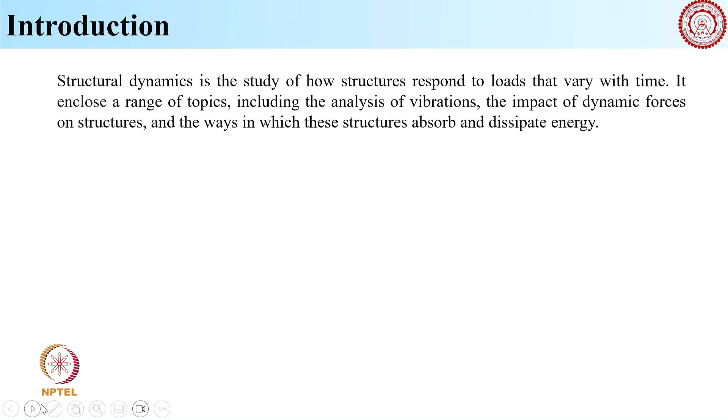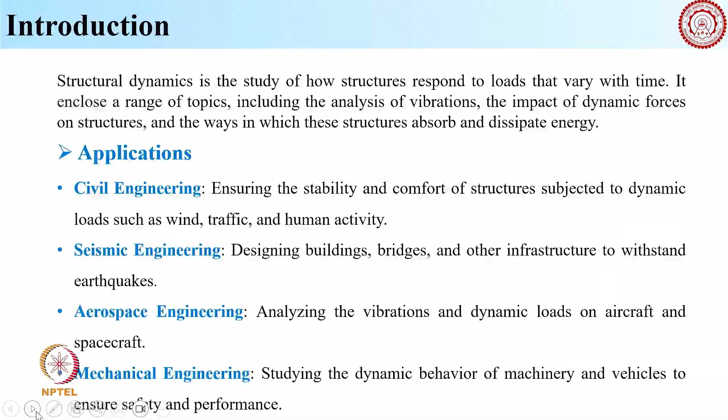Once we discuss how the structure is responding, we will also be able to see how we can mitigate or control the responses. Next, if I look at the applications of this structural dynamics course, we can see four broad areas where it is very applicable. First, civil engineering. Most of you are from civil engineering. Ensuring the stability and comfort of structures subjected to dynamic loads, for example, earthquake, traffic, wind, human activity, or several other types of loads.

Then seismic engineering, which is mostly due to earthquakes. Then the aerospace industry. When people are making aerospace structures, it can be spacecraft or an aircraft, or anything. In those cases, the analysis of vibration is also a very crucial aspect. Then in mechanical engineering also, for example, some types of machines are vibrating, or some rotors, some dynamo. All those things come under structural dynamics.

Sometimes it very well resembles the theory of vibrations, so sometimes this course is also known as the theory of vibration. There is a very good overlap between the theory of vibration and structural dynamics, because single degree of freedom systems, multi degree of freedom systems, continuous systems, and numerical integration are all also part of the theory of vibration.

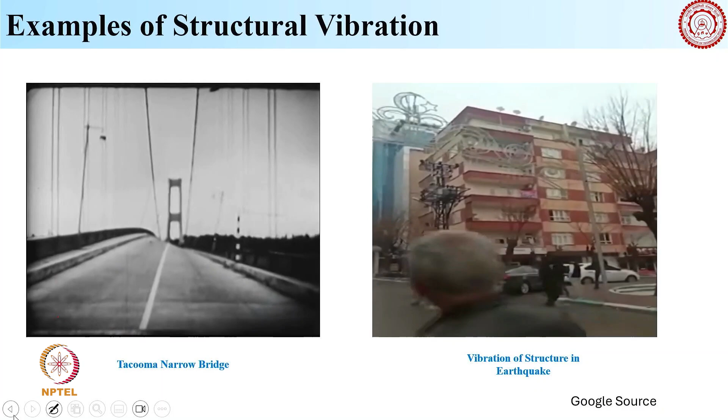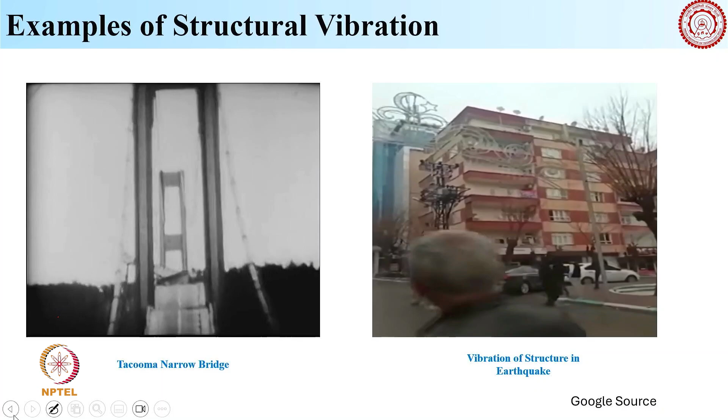You can see the left one is a video of the Tacoma Narrows Bridge. You can see how the bridge is vigorously vibrating due to the wind load, and finally it collapses. This is one of the prime motivations from where structural dynamics courses come into the picture. A bit of history: the Tacoma Narrows Bridge was designed for almost 3 to 4 times more wind load, but even at a small wind speed, the structure collapsed because it reached resonance.

And you can see such vigorous vibration happened. It's a real life video. It's not added or AI generated. It's a real life failure video. So you designed a bridge, but due to wind of much lower speed, a complete collapse occurred. So it's a very serious event. Then I'm going to the next one.

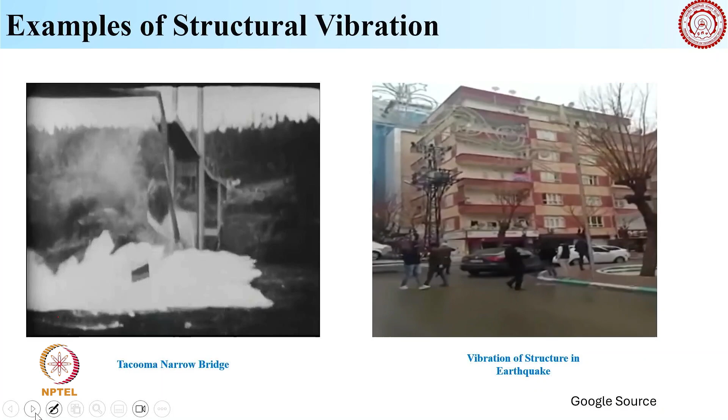You can see the earthquake vibration of the structures, and how the structures are collapsing due to the earthquake. Recently, the Turkey earthquake gave a very fresh reminder of the need for structural dynamics, and what type of catastrophe it can lead to if we do not consider it. Previously, the Nepal earthquake also caused huge devastation in that sense.

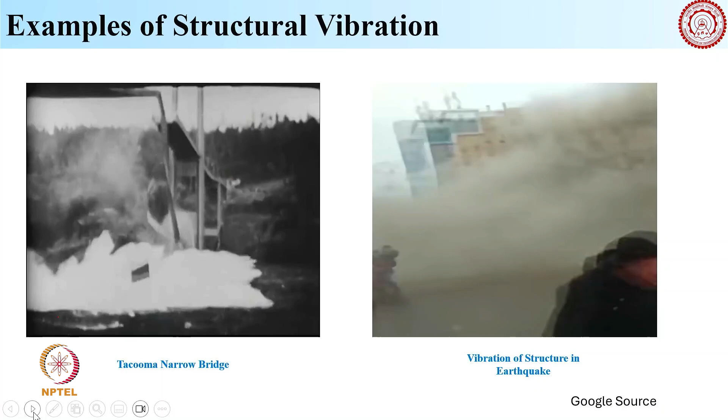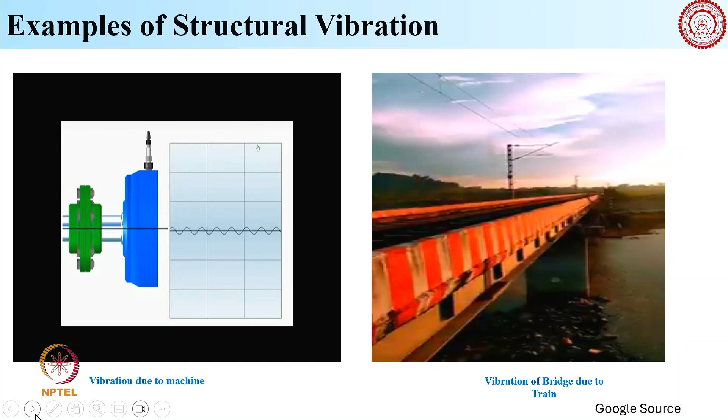So in all those cases, to measure the vibration, to understand how much vibration is occurring in the structure, and also if you try to control that vibration, this structural dynamics course acts as some sort of skeleton for that whole thing. Okay.

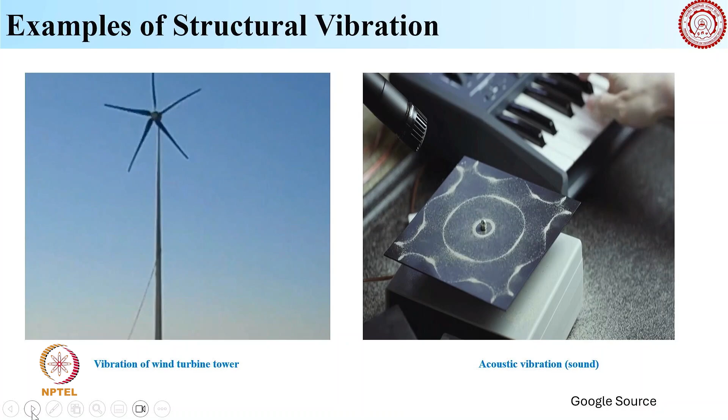Also, nowadays with renewable energy, we can see that sometimes these tower type structures are made, and they are also subjected to a very significant amount of vibration. And also when we are working with sound, that is also primarily generated due to the vibration of the wall or the panels. So that also creates a structural dynamics problem. So here you can see that once they are tuning it, it gives an oscillation. Okay, so all those things will be covered, a structure which is subjected to this type of forces.

So when we talk about how we are going to analyze, in our mind we have a structure, which is primarily a physical structure. It may be a building, it may be a bridge, or it may be any of the forms we have seen, or which are not seen but have some sort of dynamic responses. Because we just saw some of the cases, not the entire set. So the structure then needs to have some type of mathematical model.

Because suppose I talked about a bridge, the bridge is a big structure. So when we are solving it, we are solving for some specific output that we are going to look for from that bridge. So what are those outputs we are talking about? That we have to be clear in our mind. Is it in terms of acceleration? Is it in terms of displacement? Or is it in terms of bending moment, shear force? What type of parameters we are looking for should be clear in our mind.

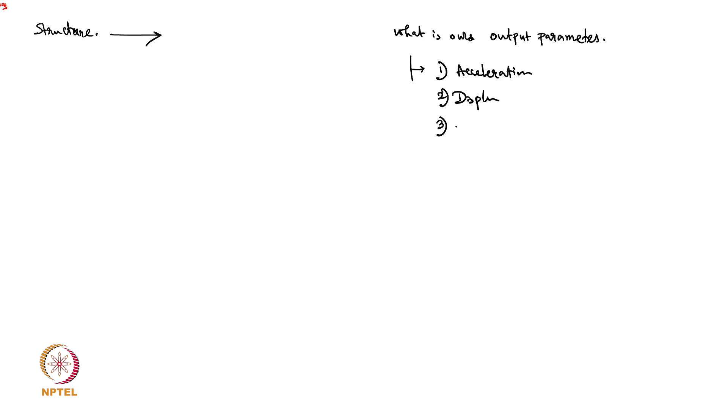So what type of parameter? What is our output? Parameters, for example, it can be acceleration, it can be displacement, it can be bending moment, shear force, any of those, or anything more. So to find that out, we need a mathematical model.

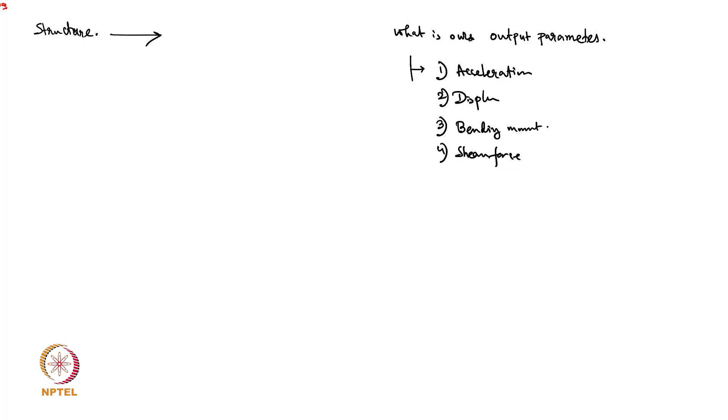And when we say we need a mathematical model, that involves how we are approximating our original structure into mathematics. So there are two things. Here we have some sort of approximation, and some assumptions are also there, and those also lead to what type of output we are looking for, and what is the fidelity of that, how well we are going to capture it.

Suppose, for example, you have a bridge type structure and you want to see the bending moment at each point. So your mathematical model should be able to capture these points so that it gives you the output accordingly. Or maybe you just need, okay, just tell me what is the deflection at the midpoint. Then you can make your model accordingly.

So obviously there is a trade-off. If you have a much more detailed model, it will be computationally more challenging. Or if you have a model which is much simpler, then it will be computationally faster, but you will get less result out of it. That is always the case, because you cannot have both.

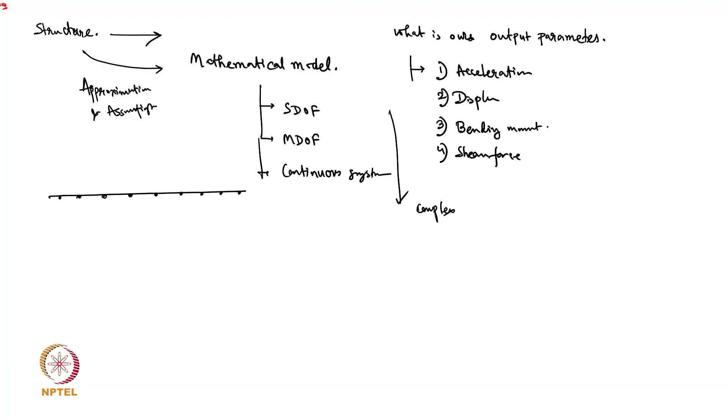So now let's see how a single degree of freedom system occurs and what basically a single degree of freedom system is. Before we start that, do you have any question up to this stage? No question? Okay, so we can go ahead with the next one. So please feel free, if you have any question, please raise your hand and you can ask the question.

Okay. So now let's see what a single degree of freedom system is. Let's assume the problem of an overhead water tank. I think most of you have seen an overhead water tank. So that's a heavy structure overhead which contains mostly fluid, and that structure is supported by some piers. So if we look at that structure, we can see that there is a heavy mass at the top.

Okay, so that mass is the mass of the concrete, and also it contains the fluid, so that fluid will also be there. So both things are there. Now after that we have the columns. So the columns will primarily provide the stiffness. Okay. So now this system can be subjected to wind or it can be subjected to earthquake. These are the two prime structural dynamics forces we can think of on a water tank.

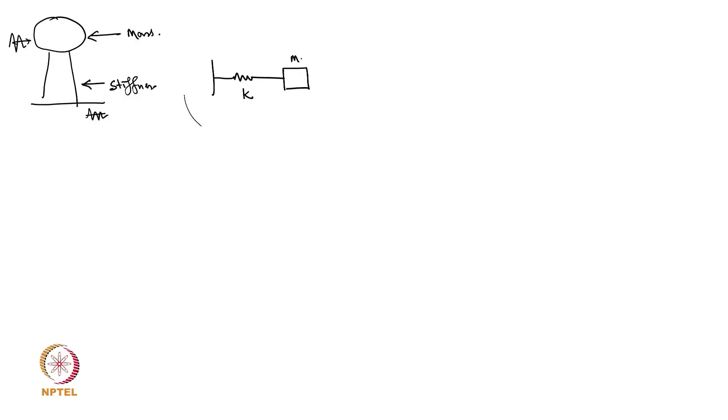We can also think of a bridge; a very similar thing is possible. For example, you can think of these as piers. So in that case, these can give the mass and this can give the stiffness. That way we can also start thinking about the bridge problem. Okay, so now we have this mathematical model. Any question up to the construction of the mathematical model from a real structure? Please feel free. Okay, no question. Very good.

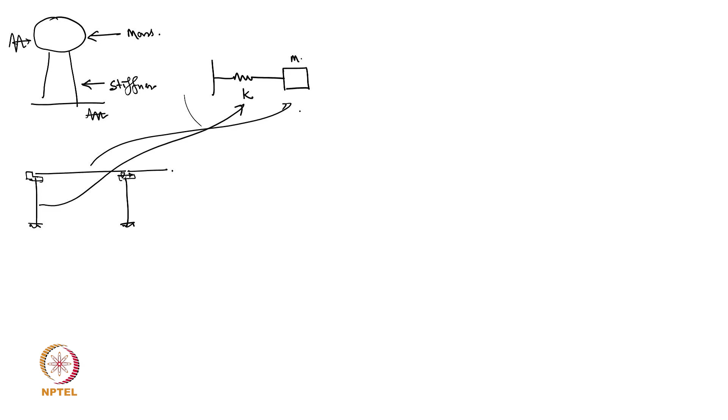So now, maybe I will just erase that part. Now suppose the structure is deflected by some amount. Let's assume it is deflected by x amount. So what will happen? Now it will have some sort of inertial force in the backward direction, and also some type of restoring force due to spring action in the backward direction.

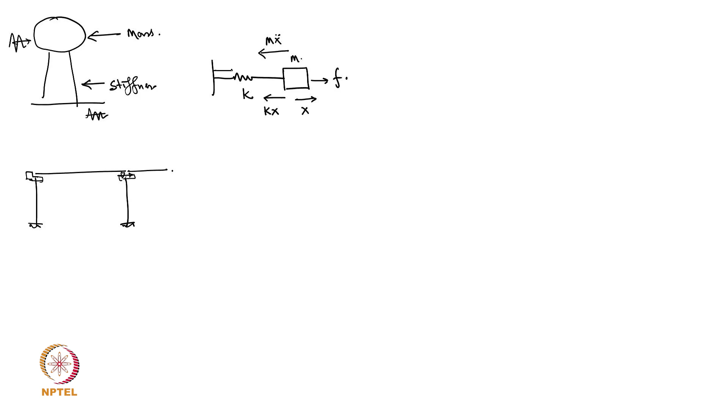And maybe you have applied some force on that structure, that is F. And also often there is some damping present in that structure, that is C. Damping means that once the structure is trying to vibrate, there will be some air. As it goes and comes back, it displaces some air, and therefore friction is generated. So it dissipates the energy through that process. So that Cx dot is another force going in the opposite direction.

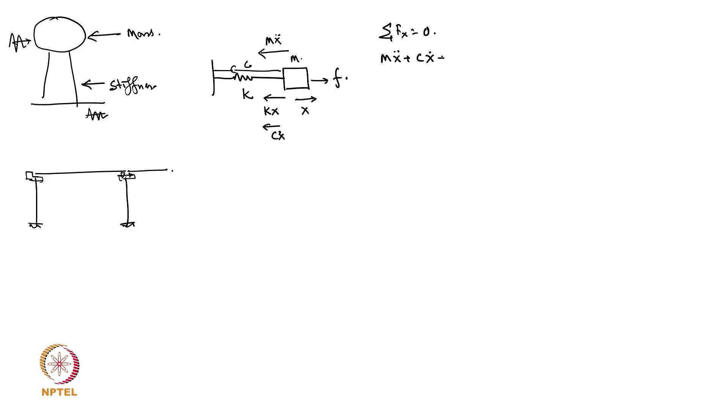So if I do the force balance on this mass, summation of Fx equal to 0. So I can write m x double dot plus C x dot plus K x equal to F. The force we have applied should be equal to m x double dot plus C x dot plus K x. Any doubt up to this stage? No doubt. Very good.

So now, for a single degree of freedom, first we are talking about undamped SDOF free vibration. It's an undamped system, which means we will assume that C is equal to 0, so there is no damping in the structure. And there will be no force as well, because it's free vibration. We will let the structure freely oscillate. So we will have m x double dot plus K x equal to 0.

Any doubt up to this stage? Very good. Here, remember one thing: once I am writing that double dot, that means this is the second order derivative, and once I write x dot, that is dx over dt. So the first one is the first order derivative, which represents the velocity, and the next one is the second order derivative with respect to time, which represents the acceleration.

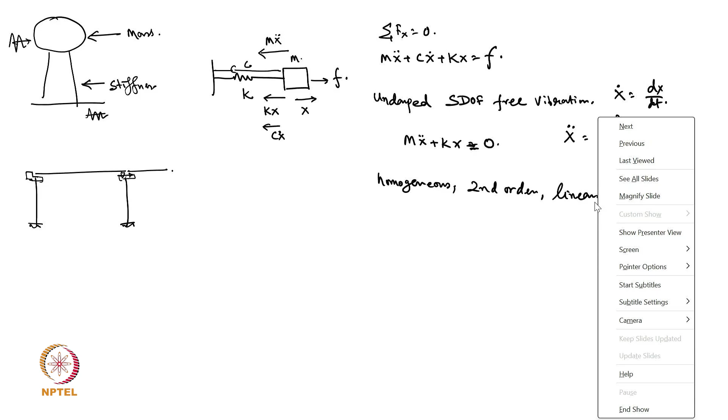Anything else? Single degree. More or less it's all right. So we can say it is a second order linear ordinary differential equation. All three points were told by the class; I added just one point, ordinary. So why is it ordinary? No higher order terms? No, we have a higher order, it is second order. Yes, it is a function of time only.

If it is a function of two or more parameters, then it becomes a partial differential equation. Here it is a function of time only, so that's why it is an ordinary differential equation. Make sense? Very good. So it's a second order ordinary linear homogeneous equation.

Why is it homogeneous, by the way? Yeah, it is equating to zero. There is no constant term present in it. Okay. And another very important point: it's constant coefficient, because all the coefficients of x dot, x double dot, all of these are constant. They are not changing with time. So it's constant coefficient as well.

So I can also write it: constant coefficient. There are some types of structural dynamics problems associated with satellite launching where the mass matrix sometimes becomes time dependent. Suppose a rocket is going and utilizing its fuel, so the mass is reducing with time, or some mass gets ejected and separated after a certain time. Those cases are different. They are not constant coefficient problems, but here it is constant coefficient.

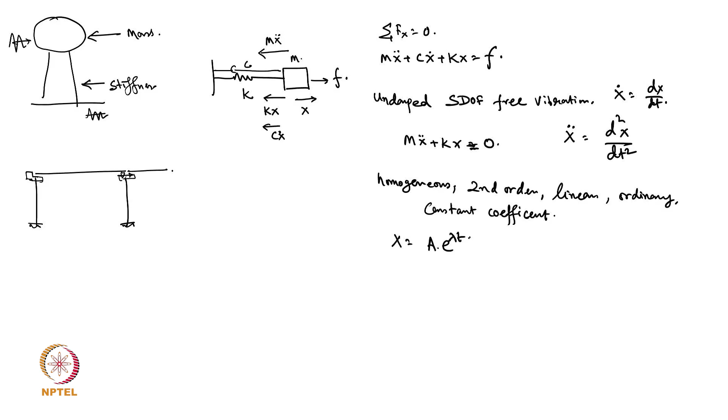So if an ordinary differential equation has constant coefficients, we can assume the solution x as a into e to the power of lambda t. That is a very standard way to assume the solution of an ordinary differential equation with constant coefficients. Agreed? Now if I assume this, what will be x dot? Lambda times a e to the power of lambda t. What will be x double dot? Lambda square a e to the power of lambda t. Very simple. Perfect.

If there is no doubt, I can substitute. That is my equation 1, this is my equation 2, and this is my assumed solution 3, 4, 5. So now I am substituting equation 5 and 3 into equation number 2. What can I get? M lambda square e to the power of lambda t into a plus k into e to the power of lambda t into a, that is equal to 0. All of you agree with me?

If I condense this equation, I can write (m lambda square plus k) into a into e to the power of lambda t equal to 0. So it has three types of solution: either e to the power of lambda t equal to 0, or a equal to 0, or m lambda square plus k equal to 0. But if a or e to the power of lambda t equals 0, we have a trivial solution, because x equal to a into e to the power of lambda t is the displacement field you assumed. Then x itself becomes 0, so you are solving a trivial solution.

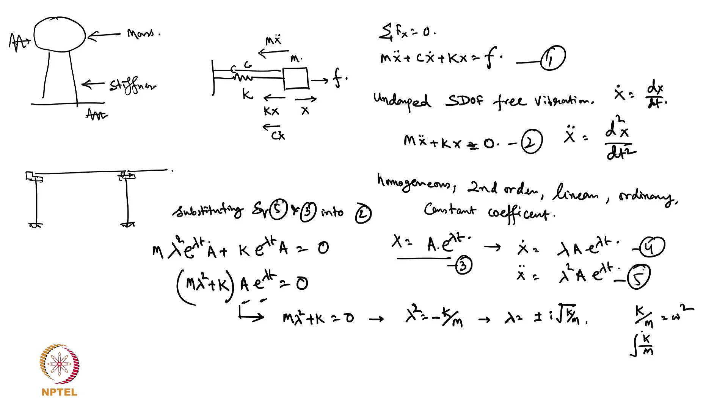Good. Now let me assume that k by m equals omega square. I just assume some parameter; let's not call it anything yet, just to make our life simple. Then root over k by m will be equal to omega, so I can write lambda equal to plus minus i times omega. Can I write that? Yeah, I can. So that becomes my equation number 6.

Now if I substitute equation 6 into equation 3, what can I get? X equal to a1 into e to the power of i omega t plus a2 e to the power of minus i omega t. Because we have two solutions of lambda, we have to use both solutions.

Agreed? And how can we use those two solutions? We have to assume that one solution is with e to the power of i omega t, and another solution will be e to the power of minus i omega t. Both are multiplied by some coefficient, and we will get the solution. Agreed, all of you? Any doubt up to this stage? Good.

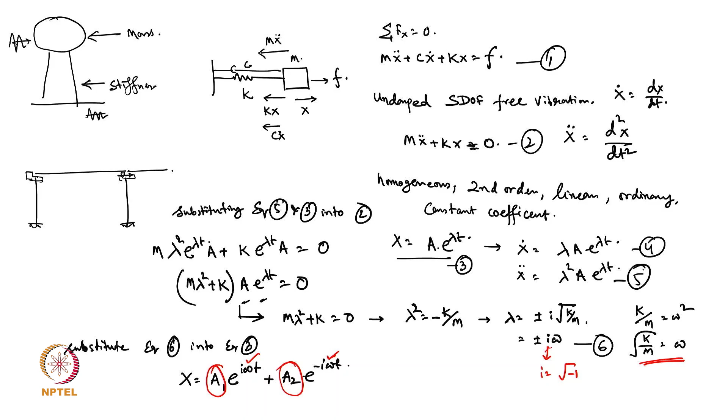So now what is our task? To calculate A1 and A2. Perfect. So let's try to do that. Maybe I'll go to the next slide. So what form did we get? We got A1 e to the power of i omega t plus A2 e to the power of minus i omega t. That we got from the last case.

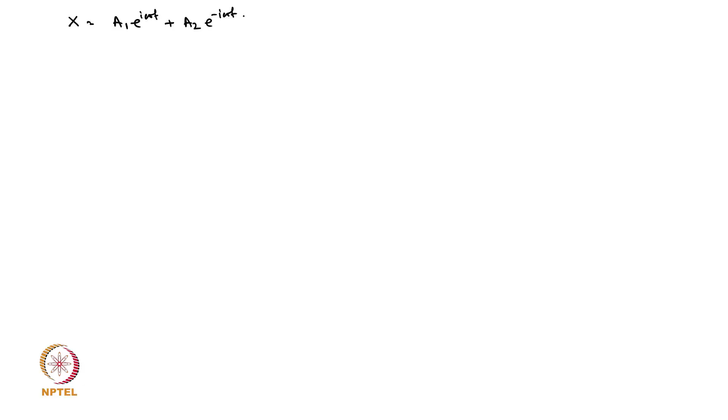Do you remember Euler's equation? Yes. Euler's equation was e to the power of i theta equals cos theta plus i sin theta. And e to the power of minus i theta equals cos theta minus i sin theta. Let me do it properly. That will be cos of minus theta plus i sin of minus theta. That means cos theta minus i sin theta. So that is Euler's equation.

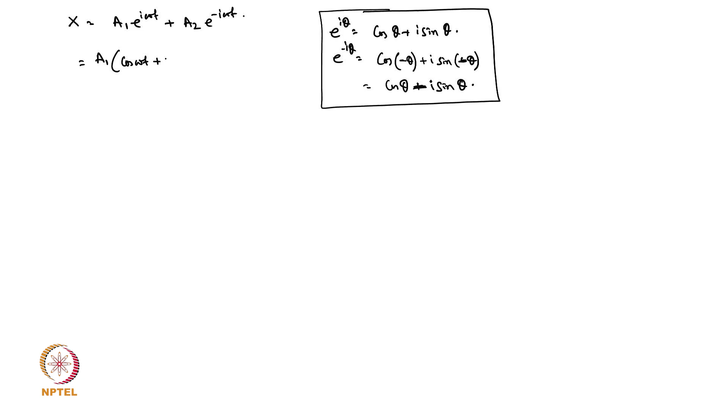So now if I use Euler's equation here, what can I get? That will be A1 into cos omega t plus i sin omega t plus A2 into cos omega t minus i sin omega t. Now I am trying to put both things together. So A1 plus A2 into cos omega t plus i into A1 minus A2 into sin omega t. That is my x. Can I say that? And I am just reassigning it as C1 into cos omega t plus C2 into sin omega t. Can I do that?

I had two unknowns, A1, A2. From there, I used Euler's equation and changed it from e to the power of i omega t to the trigonometric identity, and I am just expressing it in terms of C1 and C2. So we had previously two unknowns and now also two unknowns. Instead of A1, A2, now we have C1, C2. But the good point is that you may feel a little more comfortable because you are not dealing with imaginary numbers.

You can see in the first equation you have imaginary numbers, e to the power of i omega t, e to the power of minus i omega t, but now you have only cos omega t and sin omega t. So the imaginary part is not there. That may be a relaxing thing, although it's not a big deal. So we have this one.

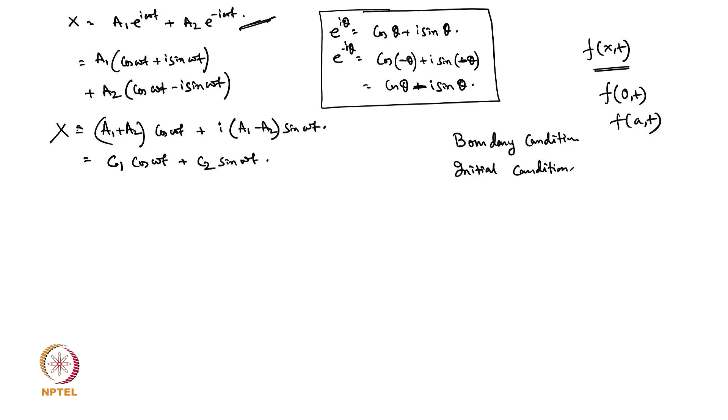Make sense? For better clarity, I can take an example of a beam. For example, you have a beam like this. Now at this location, let's say you put a hinge. So you are saying that this location is not going to vibrate. That means your W may be your deflection field, so you are writing W of a comma t, and you are saying that this is always equal to 0.

So this becomes your boundary condition, because it is telling, at a particular location in space, how it is varying with time. Make sense? Any doubt with what the boundary condition is? Yes.

Now if we come to the initial condition, the initial condition is something like we are writing this. We are specifying a configuration, how it looks at t equal to 0. That is known as the initial condition. So the initial condition is defined in terms of time, and the boundary condition is primarily defined in terms of space. So the boundary condition cannot come here because we do not have space. We have only time, so it is an initial condition.

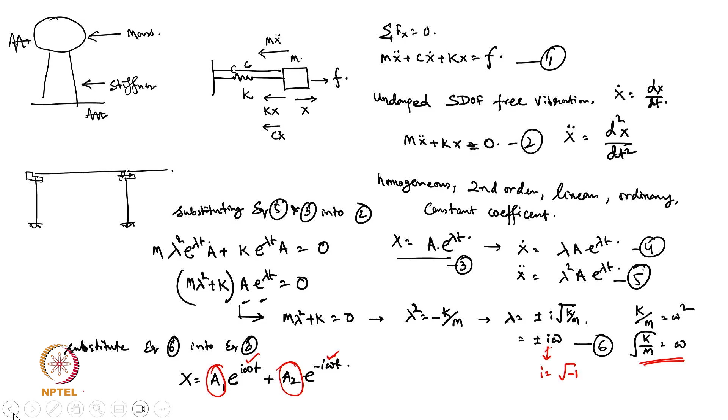So what can I say? Sorry, just let me check what number is going here. 6, and this becomes 7. So this is my equation number 7. This is equation number 8. This is equation 9. This is equation 10.

So if I just substitute, x0 will be equal to c1 cos omega 0 plus c2 sin omega 0. Cos omega 0 is 1 and sin omega 0 is 0. So this is only c1. So we can say that c1 will be equal to x0. Simple, not a big deal. Equation number 11.

And importantly, if I substitute 11 into 8, I can write x equal to x0 cos omega t plus c2 sin omega t. Now what will be my x dot? X dot will be minus x0 omega sin omega t plus omega c2 cos omega t.

Now at t equal to 0, x dot 0 will be equal to omega c2. So c2 will be equal to x dot 0 divided by omega.

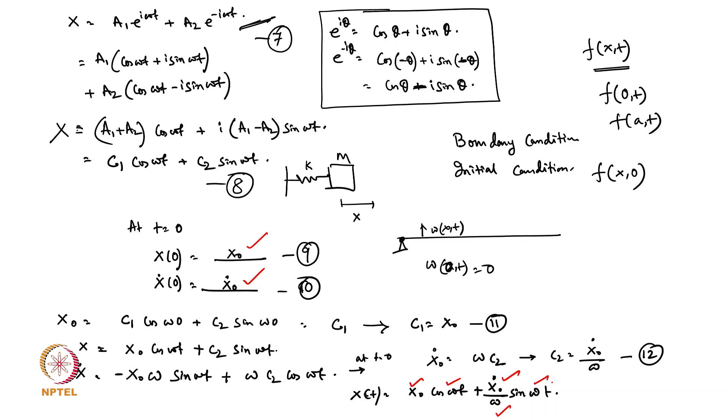Okay. So how does the function look? Sinusoidal. Because obviously it is the summation of the cosine and the sine. Cosine and sine are similar; what is the difference between these two? Phase difference, exactly. They have only a 90-degree phase difference. Otherwise, both of them look exactly the same, just 90-degree shifted. So obviously, if we are adding these two with some sort of linear combination, they will remain sinusoidal. There is no doubt on that.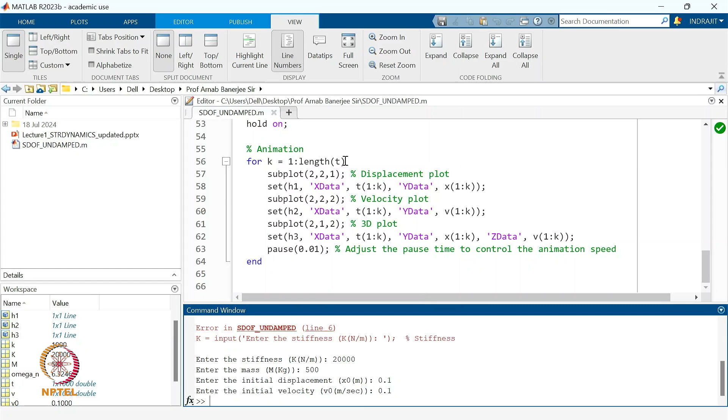Yeah, so tell some value. Please, no issue. Stiffness, how much have you given? 20,000 we have given. 20,000. Okay. Then this one, 100. This time we will put something different. Maybe 0.05. And this one, how much? Minus 0.2. Okay. Let's see how it goes.

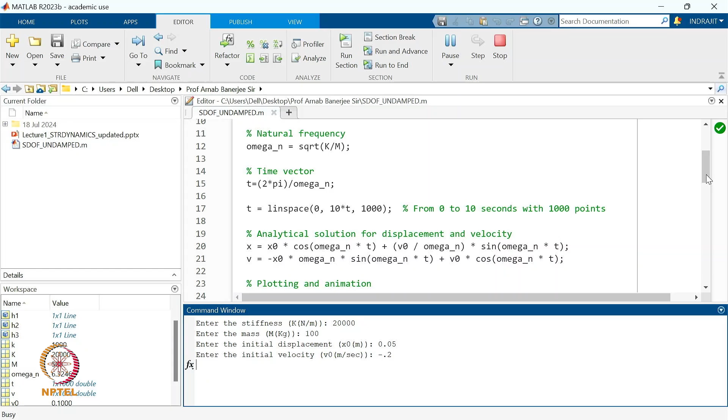So again you see it starts from here, 0.05 displacement, and velocity starts from what we have given, minus 0.2, it starts from there and goes like this. Here one point I would like to mention, omega n is quite a high value. Therefore displacement is mostly dependent on x0, not on v0, because v0 divided by omega n is there. So it is actually diminishing that term.

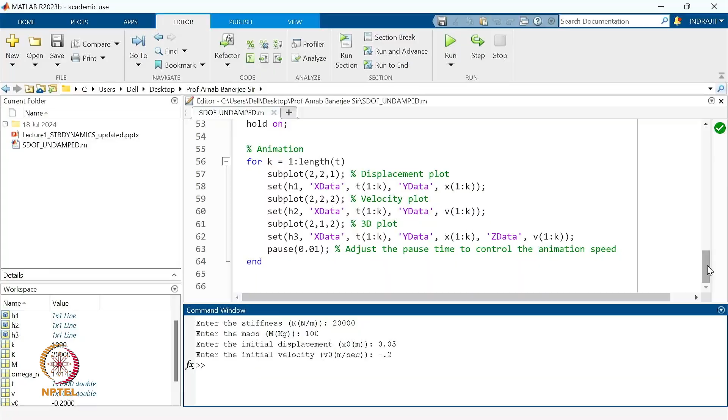So maybe we can try with one more where omega n is less. We will put k and m more or less similar, so that omega n will be somewhat like 1. Then we can see that the displacement will no longer remain near 0.05. It will be changed. Let's try with that. Okay, so here let's say we have given it 100. Mass we also give 100. So omega n should be 1. Now this one, maybe I give 0.05, and this one minus 0.2. Okay, now let's see.

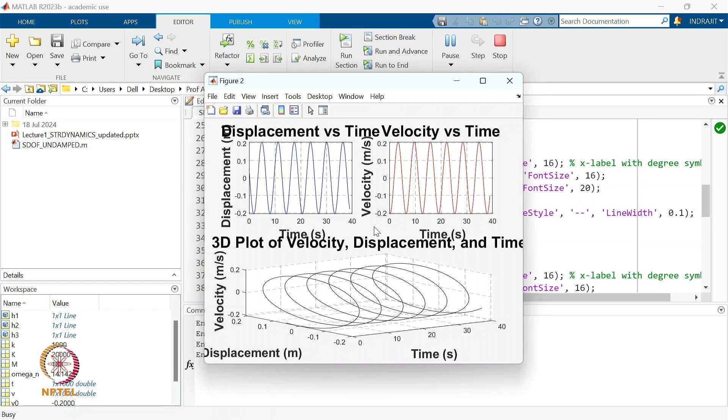Okay, and now you can see both of them are more or less coming like that, because there we have given 0.2 velocity, but still it goes a little bit up because some portion of the displacement is also affecting that. But here displacement is multiplied by omega n, so that effect is less. Previously that effect was quite significant, because velocity was getting increased, but displacement did not change. Now velocity is more or less similar, but displacement changed. So you can play with all these things and start understanding them.